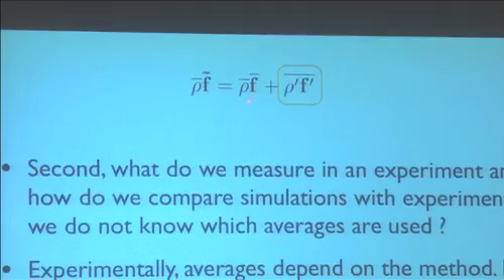The discussion between the Favre and Reynolds average wouldn't be a big one if these two numbers were close—I wouldn't even talk about it. But in practice, I'll show you that the difference between the Favre average and the Reynolds average is pretty large in the flame, and you can show that without even doing a measurement. You can use a model for that.

The most famous model for turbulent combustion in premixed flames is what we call the BML model, named after the guys who developed it 40 years ago. Ken Bray was at Cambridge, and he's still active actually—probably reviewing some of your papers.

What these guys said is: if you measure temperature at a point in a premixed flame—basically a premixed flame is a thin flame front, about 0.1 millimeter—so in a premixed flame, either the flow is cold or it's warm. That means if you measure reduced temperature, either you have 0 or you have 1.

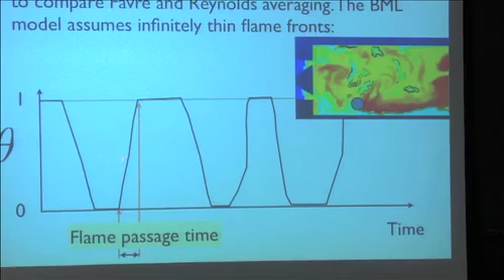In the middle, if you look at the time signal, what you see is a flame passing over you. So either you're in the fresh gas or in the burnt gas, and in between you see a flame passing by. When the flame passes by, you have what's called flame passage times, which are complicated notions, but if the flame is very thin, these flame passage times are going to be very small.

So you arrive at the BML model, in which temperature takes this shape: either cold or burnt, with infinitely small passage times in between. If you call TB the time during which you have hot gases, and TU the time during which you have cold gases, you can actually derive the Favre average and the Reynolds average. This is what I'm going to do now.

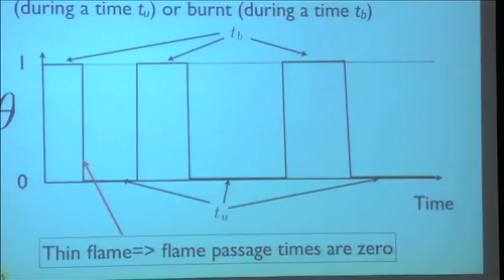First you can compute, for example, the mean temperature in the Reynolds average way. What is the average temperature here? It's easy—you average over time TU plus TB. During time TU, temperature is 0; during time TB, temperature is 1. As a result, the average temperature in a premixed flame is TB over TU plus TB.

And by the way, you see there's a big problem—we've moved away from laminar flames here. What is really this temperature, this mean temperature, the quantity you plot in Fluent, for example? It's not a temperature—it's actually a probability of having burned gases at this point. Because it's not a temperature anymore, but we call it a temperature. The right way to see this is to call it a probability.

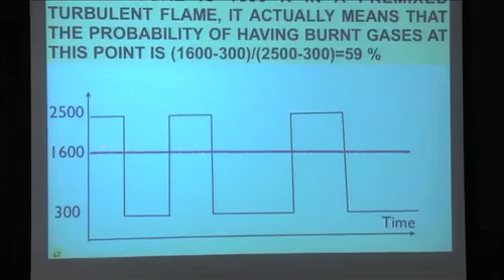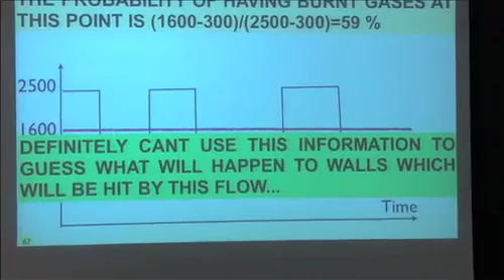In other words, the temperature at this point—if the mean temperature is 1600—really means it's going from 2500 to 300, and on average you get 1600. That means the probability of having burned gases is on the order of 59%. So it's not a temperature. It also means that if you want to use this temperature to guess what's happening at a wall, you're in bad shape—it's only a probability of having burned gases at this point, and there are moments where the temperature is actually 2500.

Now you can continue with the BML model to compute the mean density. The mean density will be, during time TU, the unburned density, and during time TB, the burned density, divided by TU plus TB. If you use the average temperature, you can express it that way.

Rho B multiplied by the mean temperature plus rho U multiplied by 1 minus the mean temperature. You can also compute rho theta, which is what we will need for the Favre average. Same thing: TU rho U multiplied by 0 when you're in the fresh gas, TB rho B multiplied by 1 when you're in the burnt gas. And so this thing is equal to rho B multiplied by theta.

If you combine these two expressions for the average density and the average product of density by temperature, you can compute the Favre average, which is this quantity, and this is what you find. Tau here is the heat release factor, the ratio of densities minus 1. Tau is of the order of 5 to 8 in a flame.

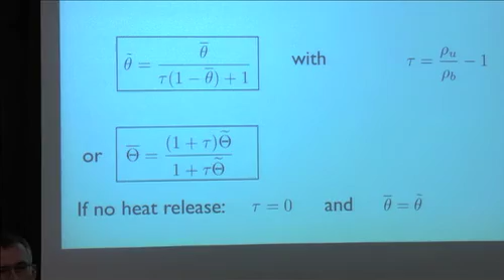So you see that you can reverse this relation. If tau is equal to 0, if you have no heat release, fine. Many of you may be studying constant density flames. That's a good idea, because in a constant density flame, no problem - no dilatation, no tau, everything is equal. But unfortunately, all the others have to face the fact that when tau is not equal to 0, this number is not equal to that one.

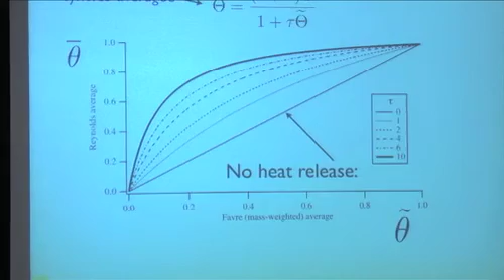So the Favre average and the Reynolds average can be very different. This is a curve here, when you just plot this thing. By the way, the BML model is very powerful - in 2 slides you can derive the fact that if this is the Favre average and this is the Reynolds average, with no heat release they are equal. If you have heat release, they can be very different. You can have a 0.2 for the Favre average and a 0.7 for the other one.

So when someone is telling you, here is my temperature profile obtained from a code, you have to say, okay, which temperature profile - Favre or Reynolds? And usually they don't know, because if you're using Fluent, you don't even know which average you're using. So this is a disturbing problem, okay?

Now there are more disturbing things. I don't want to go too far there, but if you look in this section in the book, you will see that you can prove easily that the average of any quantity Q, in the Favre sense, is equal to 1 minus theta average, Favre average, multiplied by QU, where QU is the conditional average of Q in the unburned gas, and then you add theta multiplied by QB.

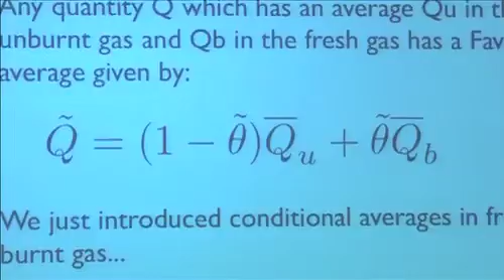What does that mean? What is a conditional average? Typically, a conditional average would look like this. If you measure the velocity in a flow which is reacting and turbulent, you will usually find out that the velocity looks like this - at this point you are in the fresh gases, and then suddenly you are in the burned gases, and then it comes back again.

So what is the conditional average? It's the fact that you're going to look at the theta signal at the same time. This is temperature, and this will be QU. You will measure the average in the fresh gases, or you will measure the average in the burned gases. These two quantities don't have to be equal. Obviously the speed, for example, in the fresh gases, when you average turbulence, it will have a certain average, but it doesn't have to be the same as what you have in the burned gases. And so that's making things more interesting.

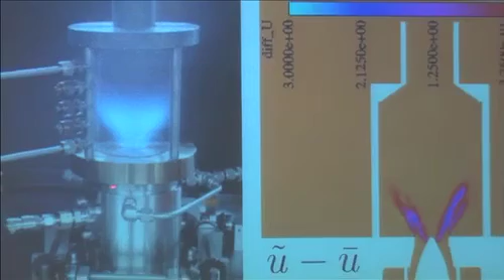So this is a notion called conditional averages, and you can actually use it. I'm going to show you a few examples. I just want to show you here this burner, which is actually the premixed burner I talked about a few minutes ago. This is a field where we plotted the Favre average - this is an LES - minus the Reynolds average. In this LES, you can compute both of them. You find actually that there are big differences here in this zone.

Of course, there are differences in places where temperature is changing. If temperature is constant, no problem. But in the zone where the flame is, which is the zone of interest, U tilde minus U bar can be of the order of 3 meters per second.

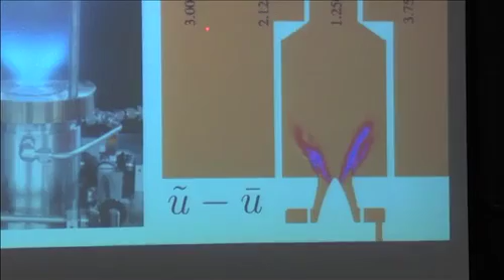Now, if you look at the velocity field in this system, you do cuts here. You put lines here, and you plot the velocity profiles. This is the result - you have the experiment, which is in symbols, and the lines are the LES, and this is typically the 3 meters per second error margin. So in other words, when these points are separated by less than 3 meters per second, it could just be that you're not comparing Reynolds and Favre average in both systems.

In LES, we know which average we take. Again, you talk to experimentalists, you ask them, is this Favre or is this Reynolds? And they won't be able to tell you, because it's difficult in an experiment to know exactly how many samples you take. You take random samples - you don't know if they correspond to the weighting that Favre would require, for example.

Now, it's not the only problem. Turbulence is about fluctuations, so you would like to compare fluctuations also. Here is getting really complex. So let me just give you an idea of why things are getting complicated here.

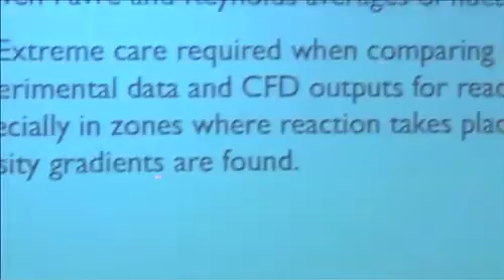When you have large density gradients, this will require some care on how you compute fluctuations. One of the reasons is the following: in LES, we use space average results. They are instantaneous, and then we average them in time if you want the mean.

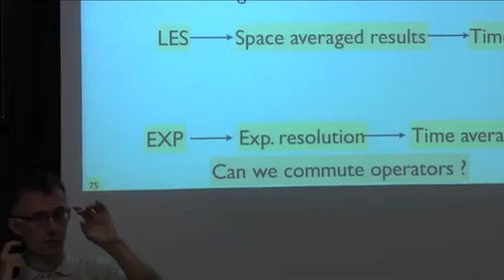In an experiment, you have the experimental resolution. If you're doing PIV, you have a window over which you average results, and then you average them in time. If you're doing LDV, it's different—you still have an averaging window, which is the zone where you have a signal, and this zone doesn't have a clear size, but it's also averaged in some sense.

In the end, what everyone in this room is doing is comparing time average results of LES with time average results of experiments. First thing you have to realize is that the time average results of experiments are obtained over minutes, seconds, while time average results of LES are obtained after milliseconds.

So we have another problem of sampling. Experimental data are very well sampled, while LES, by definition, is very expensive, and we cannot run for seconds. A typical LES in a combustion chamber, if we run 100 milliseconds, it's going to take us 1 million CPU hours. So you don't do that.

In other words, I'll show that tomorrow: 1 millisecond for one of the computations we were doing last year corresponded to 10 years of CPU on a single processor. So you cannot afford to run for a long time. That's a big problem. So let me try to clear this question here.

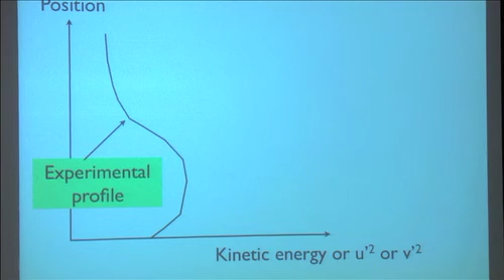This is typically the kinetic energy that you measure in an experiment. You go into the experiment, you have PIV, LDV, whatever, and you plot a profile in any direction of kinetic energy. Then you go into the LES—the first thing you see is that it's going to be much more noisy.

He can run the experiment for an hour if he wants, but you can't. So it's noisy, and usually there's a difference between the two. The question is, why is there a difference?

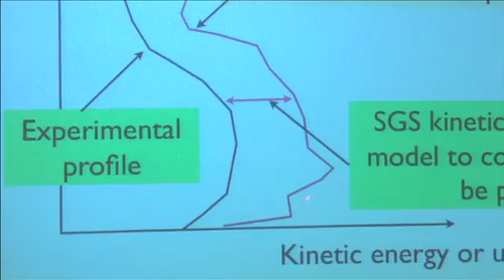In other words, if you have an LES, and this data is here, you can tell the guy doing the LES is wrong, it's not going to work. Something is wrong. This curve should be less than the experimental value, and the difference between the experimental value and the LES corresponds to the subgrid scale kinetic energy that you can model.

But as soon as you need to put a model there, it kind of wastes the interest of comparing things. You're not comparing data to data, you're comparing data to data plus model. And that's a big problem for us. So in most cases, we don't even add this kinetic energy. We just compare the raw data, and we know there could be a difference because by construction, we're not comparing the same thing.

Now I need to start working on the real methods that you use to average, and I will start by averaging methods.

When you use RANS or LES, the same problem you have is to average the Navier-Stokes equations. We want an equation for the average temperature, for example. How do we do that? We take the equation for temperature and we average it, and normally we should obtain an equation for the average temperature. Except when you do that, you end up with what we call unclosed terms.

So we start from the instantaneous Navier-Stokes equation, and we'll end up with typically terms like this, where we'll have, for example, the product of the velocity by the temperature. If we wouldn't have these nonlinear terms, life would be extremely easy. If, for example, all the Navier-Stokes equations would be linear, if you would only have terms like alpha theta, where alpha is a constant, when you average them, you would find alpha multiplied by the average temperature. That'd be simple. But in practice, it's not the case.

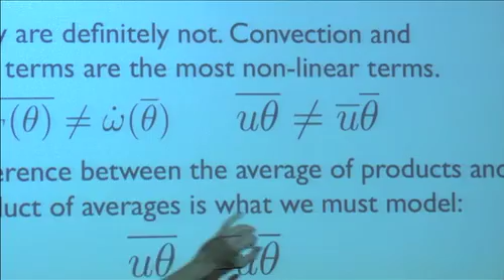In practice, you have a lot of terms like this one, the product of a velocity by a temperature, and since it's a nonlinear product, this is not equal to that. And of course, in this term here, we have a lot of exponentials. If you take the average of an exponential, you will see in a few seconds, it's not equal to the exponential of the average. And so the difference now between this quantity and this quantity is what we have to model.

We want to express everything in our terms as a function of this quantity. These are the quantities which are the variables for our code. And these correlations, we don't know them, so we want to model them. We need to replace them.

So what's the procedure? We start from the Navier-Stokes equations, and we average them, and we get unclosed terms. For these terms, we need closure models. And by the way, you see we are far away from all the details of kinetics. We're not able to incorporate all this stuff here.

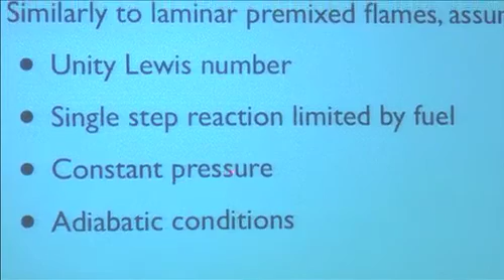So let's start with premixed flames, supposing that the Lewis number is unity, that you have a single step reaction limited by the fuel. This is what we did for premixed flames, under adiabatic conditions and constant pressure. In that situation, as I've shown yesterday, you can have only one variable, the reduced variable called the progress variable, which I'll call C or theta depending. In the world of premixed turbulent combustion, everyone works with that thing, going from 0 in the fresh gases to 1 in the burnt gases.

If you look at the Navier-Stokes equations and average them, this is what you find. The continuity equation remains what I've shown before, except here you have an average for the density and a Favre average for the velocity. If you look at the momentum and the temperature equations, they really look exactly like the laminar equations, where you would replace the instantaneous value by mean values, except you have additional terms here. These two terms here are turbulent diffusion, and this is the mean reaction rate.

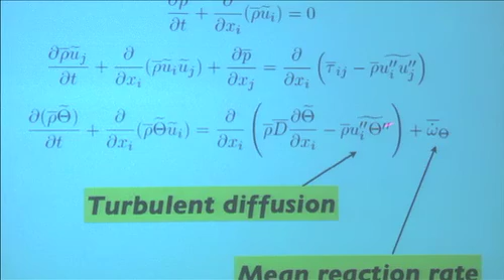And these two terms are what you need to model. I'm going to show you models now. I don't want you to be afraid by the way we build models, because this is the way it's done. I think you're going to have a hard time believing how simple this is, but this is the way we do it. Our goal now is that you can write a code where the variables will be rho bar, theta tilde, and ui tilde. If you want to write this code, you have a problem, because this is not expressed as a function of the mean variable. So you need a model to express this as a function of these quantities. How do you do that?

Well, the first thing you look at is the turbulent diffusion term. It's the rho u theta correlated average. So you can write it as average density multiplied by the Favre average of these things. And how do you model it? You need to model it as a function of things you know. What do you know? Well, you know the mean temperature. So usually you're going to write this thing as a gradient of temperature. It's exactly the same thing you do when you use the turbulent viscosity for the momentum equation. You try to express what you don't know as a function of things you know.

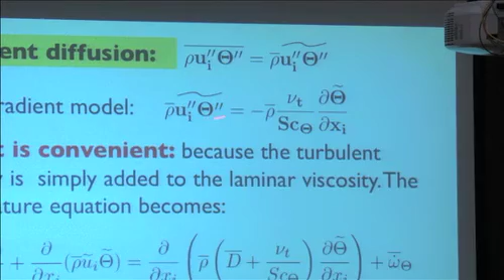So when you do that, the nice thing about this is once you include this approximation in your model, you end up with this equation. Instead of having an unclosed term here, you have something which is a function of the mean gradient of temperature, and then you just need to add a turbulent viscosity or a turbulent diffusivity. Normally you say the turbulent diffusivity is equal to the kinematic viscosity, the turbulent one, divided by a Schmidt number. The Schmidt number here is usually taken equal to 1. Well, you can do that, but it's a dangerous operation, and I will show why it's dangerous in a few seconds.

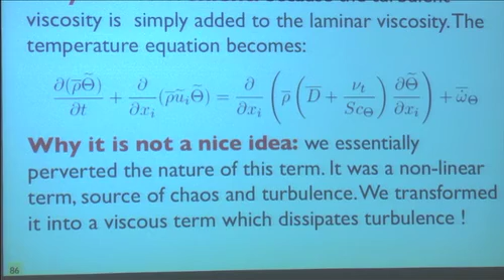Then, if you look at this expression, you can wonder how we got this shape exactly. Let me show you how this is done. It's written now with C instead of theta, but it's the same demonstration. We look at a flame where the mean temperature looks like this. You have to realize that when we show something like this, it really means a flame which would look like that. If you do a DNS, it would be a flame like this, where C equals 0 here and C equals 1 here. And the mean temperature would be 0 here, and as soon as we start seeing some flame elements, it goes up, and it's doing that. So this is theta average.

So we need to model now this term, this guy here. How do we do it? Well, people doing turbulent combustion, you know, they are not very subtle. They say, well, this term is zero here, because here C is equal to 0, so of course its perturbations are equal to 0. And this term is also equal to 0 here. What else do we have which has the same property? Well, the gradient of C, obviously. The gradient of C is non-zero in the same zone.

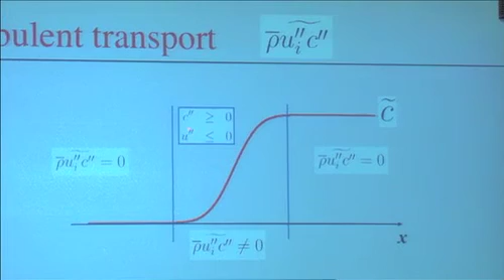That's a good model. The second thing you say is, what should be the sign of this thing? Well, it would be good to have a model which has a good sign, and the good units also. So you look at the sign of this thing. That's a usual problem here. What is the sign of this thing? If C here, this number is the perturbation compared to the mean. So typically, if you are here and you see a positive C, it means you are above this line. You have something warmer than the average.

And now the intuition is the following. If you are here and you see something warmer than the average, it must come from the right side, because the warm people are on the right side. So if C is positive here, the perturbation, then the velocity must be negative, and vice versa. In other words, we know that the sign of C tilde, U tilde here, C prime, U prime must be negative. That means we need to put a minus. That's a good model. And then you look at the dimensions, and you realize that to have the right dimensions, you have to put a viscosity and a constant here. If you're smart, when you write a turbulent combustion model, you always plug in a constant that you can tune later to make the model work.

And this is how this model was built. Believe it or not, it's used in all codes. Everyone in LES is using this model, everyone in RANS even more. And if you're using Fluent, you do that every day. Now why don't we like it? Well, we don't like it, but you have to use it anyway. I just want to give you an interpretation of what has been going on here.

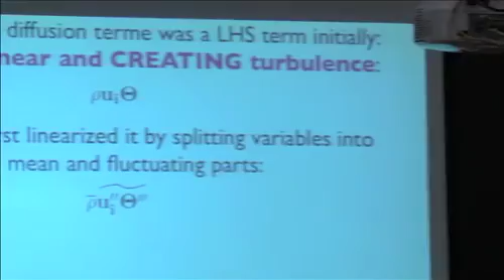I didn't mention that before, but you have to remember that turbulence—probably some of you have taken courses on chaos and bifurcations and all this stuff—you have to remember that if the world of the Navier-Stokes equations would be linear, there would be no turbulence. Turbulence occurs only because you have nonlinear products of things. So nonlinearities are the quantities which create turbulence.

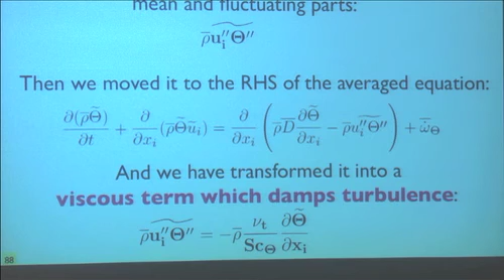Now what we did here is that when we average this term, it created another term here which has the same nature. It's a turbulent term, an agitation term, it creates turbulence. And then we transport it to the right-hand side. That's fine, you can take it from here, put it here. But then we transformed it into a viscous term. So the nature now of this term is completely different from what was there initially. Instead of having a term which creates turbulence, we have transformed it into a term which damps turbulence.

So this model cannot be accurate. At the same time, we don't really have a choice. I will tell you why in a few seconds. We don't have that many alternatives for that. You can use the BML model to understand what we really did, actually.

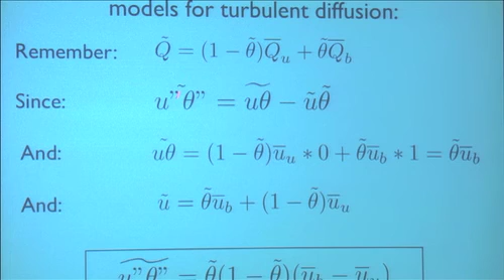I've shown you this property here of the Favre average being expressed as the conditional averages in the fresh and in the burned gases. You can use it for this quantity. And you can show that the term that we just modeled is equal to this product of mean temperature multiplied by the mean velocity in the burn gases minus the mean velocity in the fresh gases.

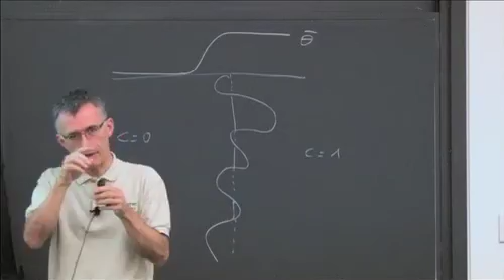How do you do that? Well, you go here, you draw a line here, and you take the mean temperature for all these points. This is called the mean temperature in the fresh gases, and for the burn gases, you do the same thing for the rest. So when you are completely in the fresh gases, the conditional average is equal to the normal average, and vice versa. But in the middle here, these averages depend on how much fresh gases, how much burn gases you have.

The interesting thing is that the model which we just wrote is this one, and the BML model tells you that these two things which should be equal is this one. So that really means that the gradient of temperature and the difference of the velocity average in the fresh and in the burn gases should have the same sign.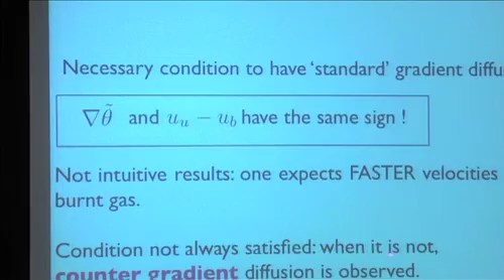In practice, this thing is not intuitive at first. One would expect faster velocities in the burnt gases, whereas this thing says it should be the other way. And this condition is not always satisfied. If it's not satisfied, then we have what we call counter-gradient diffusion. Counter-gradient diffusion is also a big hit in the field of premixed turbulent combustion. It's those cases where the model here just doesn't work—even the sign is not right.

So this is a point which can be investigated in DNS. Actually, DNS is a good way to investigate these questions. We did that a few years ago. That's a very big DNS here. You have the cold gases, the burn gases. The gradient of temperature is positive in this way. And we did two cases, one with low turbulence intensity and another one with high turbulence intensity.

This was published in CNF a few years ago now. And when you plot this term which we model, we saw that there was a different sign actually for the low turbulence and the high turbulence case. In other words, for this DNS, we found counter-gradient diffusion here, and we found gradient diffusion here. And that really proves that the model which everyone is using is not valid in all cases. At high turbulence intensity, it is valid, and at low turbulence intensity, it's not.

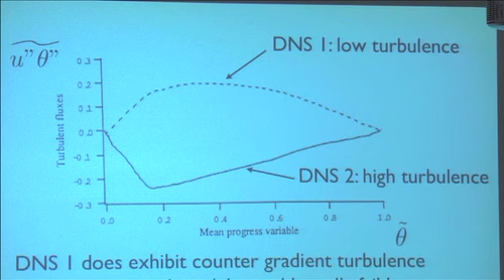So in the end, what you need to remember is that everyone is using this model, but there are situations where even the sign of this model will be wrong. You have to know it. But on the other hand, we don't have much choice to replace this model. People have tried to find better models, and for the moment, everyone is stuck with this one. So this is what you will find in the literature. There's not much more to do about that. The only thing you can do is use a smaller mesh to decrease the importance of this.

Okay, let me talk about the second term now, which is even more of a problem. This is the reaction rate. So now we have, yeah.

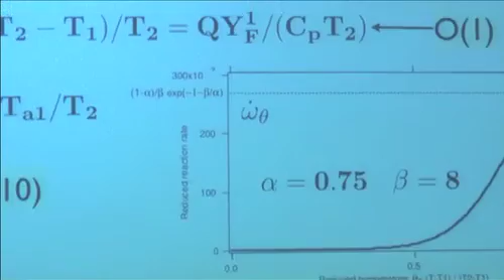When you do the model, if you don't have a DNS of the thing, how do you know the ratio of burnt gas? You don't know - you need to write a model. The question is, without a DNS, how do you know which portion is in the fresh gas and which is in the burnt gases? You need another model to tell you that. You can guess, for example, from the mean temperature: if it's small, you're on that side; if larger, on the other side. But again, you need to invoke more models there. It's modeling again, you need to guess things. That's the problem, but it's not the worst problem.

I'm going to show you the worst problem now. It's that you need a model for the temperature and the heat release. The heat release has this expression, which we saw yesterday as a function of the reduced temperature - it's a curve like this. What we need to do is figure out: we know that if the temperature is here, the instantaneous reaction rate is here. But we don't know the instantaneous temperature, we just know the mean temperature. So we need to guess what the average reaction rate will be.

And if you remember your math, you know that if this curve is nonlinear like that one, it's very difficult to average. So let me show you why.

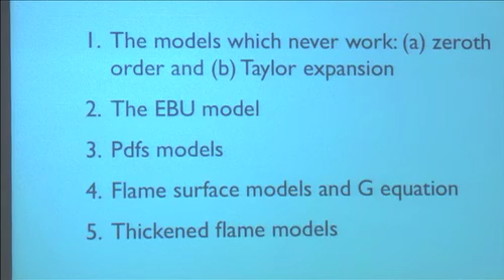So the model which never works is the following: if we know the shape of the reaction rate, why don't we just plug the mean directly into the expression? We know the instantaneous form, so we take exactly the same expression for the mean. That's a simple way of doing it.

But the problem is that's a simply stupid idea, because the shape we're trying to average is the following: if you plot temperature versus time, you have these things, and if you plot the reaction rate, you have this - every time a flame passes in front of you, you get a big spike of reaction rate, then it goes back to zero. The mean reaction rate is the average of all these spikes. For example, these two temperature signals have the same mean temperature, but one has many more passages than the other. So if I just use the mean temperature to construct the mean reaction rate, I can't - this won't give me that.

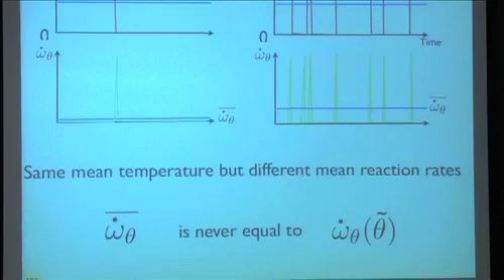You can also prove it by doing the math - I'll do that in a second. But in a system like this, which is completely nonlinear, you cannot just plug the mean into the expression to get the result. You need more information.

Now, of course, you could say: I understand the problem is that you're doing something too simple - why not take more points in the Taylor expansion? Basically, what we try to do is look for the mean of this expression. Plugging the mean directly into the expression might be too simple, but maybe we could take a Taylor expansion instead - expanding the exponential as a function of higher order terms. The terms are a bit tricky, I don't want to go into the details, but you end up with a model for the mean reaction rate where the means are plugged in directly into the expression.

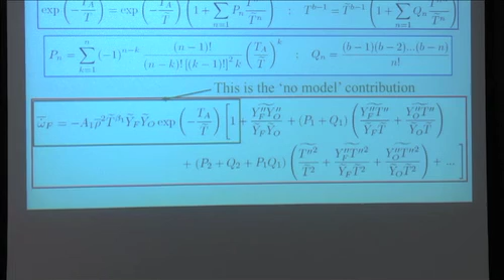So if you look at this term here, this is what we call the no-model contribution, and then you have a contribution of the different non-linearities in the problem. You can try to use this, but in practice when you do that, you find out that this term is larger than that one, this one is larger than this one, and this one is larger than that one. In other words, it's a desperate attempt, because every correlation here is larger than the mean. So in most cases, you don't do that.

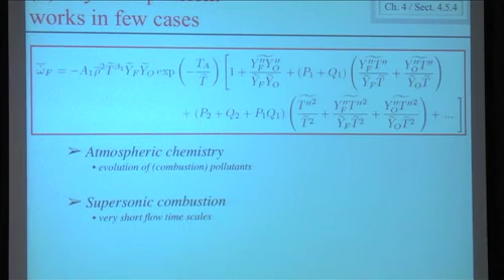There are a few cases where it works. Just want to mention those cases. Atmospheric chemistry is one example where people use a model like that. In supersonic combustion, because the flow time is so fast, you can use it. But in all other cases, no one's using that. It simply doesn't work.

So let me jump now to the opposite side: the Eddy breakup model. It's probably in all codes—if you're using any commercial codes, they have the Eddy breakup model in one shape or another. It's really interesting because it was written by a guy called Spalding, Brian Spalding. And Spalding didn't care about the details, he just saw the big picture. He said, what's important for reaction is to have flame passages for the mean reaction rate.

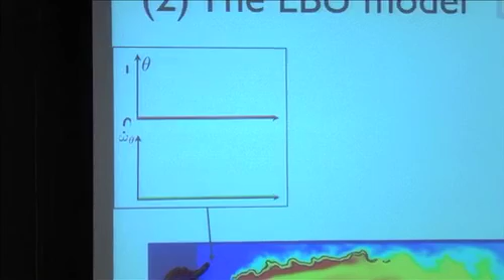For example, if I'm sitting in the fresh gases, there's no flame passage, so I should have a zero mean reaction rate. If I'm sitting in the burnt gases, it's the same thing—the temperature is equal to 1, there is never any flame passing by, so the reaction rate should be 0. And in the middle, the reaction rate should be proportional to the number of passages of flame. A very simple idea.

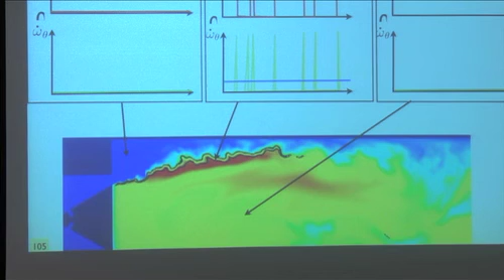It's nothing complicated about that. So he said, can I write a model which accounts for that? How do I count the fact that the flames are passing by or not? Well, there's a simple way to do that.

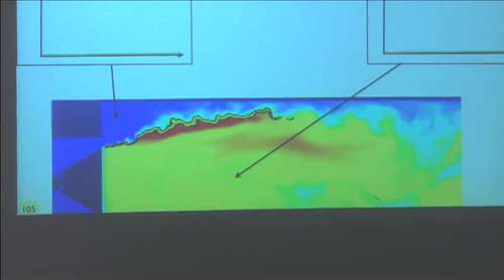The other quantity, in terms of bounding, which is 0 here and 0 here, is the fluctuating temperature, the RMS of theta. It's 0 here because theta is constant equal to 0, and it's 0 here because theta is equal to 1. So you just write the model where you say the mean reaction rate will be proportional to the fluctuation of temperature.

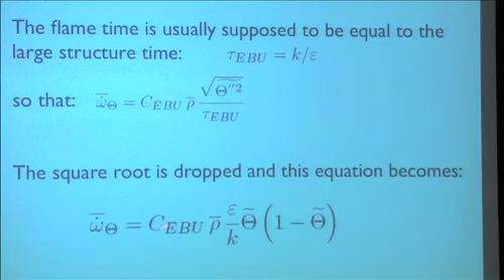And after that, you introduce a time linked to the number of eddies which lead to flame passages. You suppose also that the flame is thin, and if the flame is thin, using the BML method, you can prove that this quantity is equal to that, only with averages, and you end up with the famous Eddy breakup model. It says there is no reaction rate when the temperature is 0 or 1, and in the rest of the region where there are flame passages, the reaction rate has this shape here, scaled by a constant and by a time—this is the time of the largest eddies, epsilon over k.

And you just plug that into your code, and right away it works much better than the other models. So why is it so? The first thing is that when you do measurements, you can measure the mean reaction rate in an experiment. You see actually that this is data obtained at École Centrale in Paris. You see that the mean reaction rate as a function of the mean temperature has definitely a shape which looks very much like x multiplied by 1 minus x.

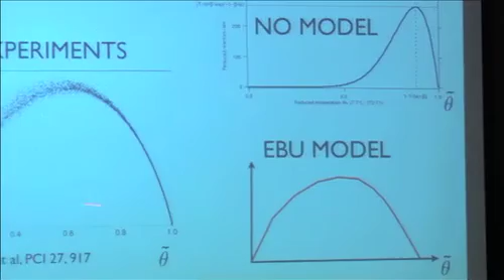And here, look at this function, it's x multiplied by 1 minus x. It's much closer to the Eddy breakup model than what we would get with the no-model. The no-model would assume a shape like this, and that doesn't work. So we see that the Eddy breakup model captures a lot of the good physics here, the physics you would like to have.

So it's good, but at the same time people could say, hey, why is chemistry gone? Because, for example, the pre-exponential constant I had in the reaction rate, where is it now? Well, the answer is it's gone—it's in the constant, it's hidden here. You don't even have the equivalence ratio here, it's gone. So the problem with the Eddy breakup model is that when you run it for one flame, you're tuning this constant until it works. You go to another flame, you have to tune another constant.

I remember papers submitted to the symposium 10 years ago where there was a table of constants to be used as a function of the case. They tabulated the constant, and then you can say, if I have the flame, I can compute it, but if I don't have it, I can't. So it's not a predictive model. But for certain cases it can work, for example if you just change the geometry but not the chemistry, you fit the constant once and probably you can use it to extrapolate things a little bit. But this model is really the one you will find in a lot of places.

At the other end of the spectrum, you have PDF models. PDF models are what we call the ultimate model. PDF basically tells you that if you want to know what's going on, you shouldn't know only the mean, you should know all the PDF. The PDF is just a way to talk about histograms.

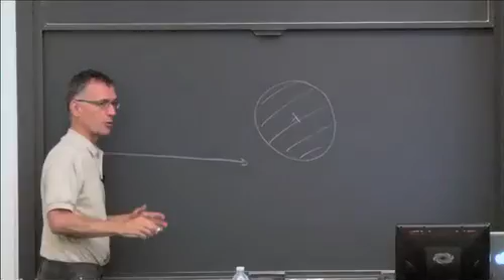We can do that right away here. To give you an illustration of PDF, we can do the PDF of the size of the people in this room. I cannot do it in feet, I have to do it in meters. So you take the first guy down there and ask him what his size is, and he says 1.8, and you put a +1 here. Take his neighbor, he's 1.71, and you add a system like this, and you end up with a histogram of the sizes of the people in this room. You can do that, for example, for Princeton University, and you will obtain a shape. How would this shape look like?

I've been doing that for 20 years, and it always works.

No, it's not Gaussian. I believe it looks like this. Because men are usually taller than women. Depends — in France, we did it actually in my school, and we got two bumps here.

The idea here is that it shows that it's easy to imagine a PDF, but it's not easy to find the shape of the PDF. As soon as the process gets complicated, guessing what the PDF is becomes the whole game.

If you have the PDF, then you have everything. Because, for example, the exact expression of the mean reaction rate is just the reaction rate for a value theta star multiplied by the PDF of theta star, d theta star. You integrate it and you have everything. So the idea with PDF models is if you have the PDF, you have everything. In practice, having the PDF is the difficult part of the game.

To find the PDFs, I won't go into that now — it's not that I don't believe in these things, I just believe they are too difficult for me. There are quite a few good papers, including one at the last Hottel lecture last year by Steve Pope, who is really the king of these things. The difficulty really in this problem is to build a PDF.

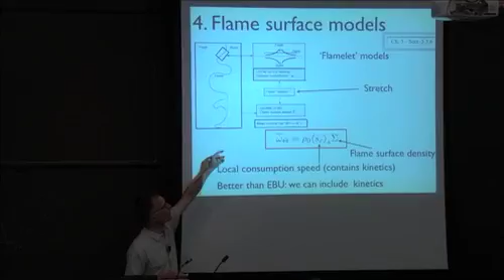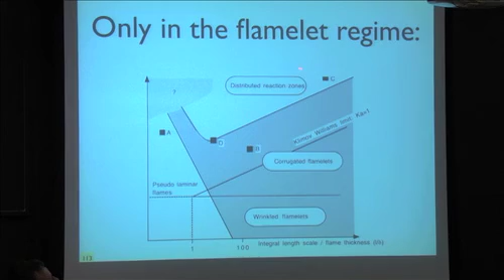Now, one model which is a good intermediate solution is the flame surface model. Flame surface models are used in multiple places — for example, piston engines, they are quite often found there. The idea here is to say that if the flame looks like a flamelet, if it's a surface, the average reaction rate along the surface will be the average consumption speed multiplied by the flame surface multiplied by the density. So if I know these two quantities, I can find the average reaction rate. You can only do that if you're in the flamelet regime — you shouldn't use this for a flame which is really turbulent. But in most cases, in this region, you can use flamelet models, and you will have two quantities to find: the mean consumption speed and the mean flame surface.

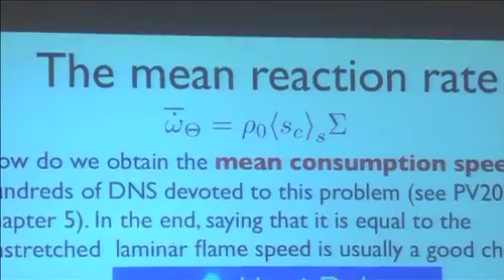In most models, the mean consumption speed, even so I told you yesterday, is complicated. It depends on the stretch, it depends on curvature, it depends on other things. In practice, what people do is say the mean consumption speed averaged along this surface is just the unstretched laminar flame speed. That's it, because it's difficult to do better than that.

So the real problem is not there. The real problem is to find the flame surface density. Because on this quantity you can make a mistake of 20%, but on this one you can make a mistake of 500%. How do you find the flame surface density of a flame?

Again, when I talked about flame surface, it looks like a simple idea. If you want to know really what flame surface is, you need to read this paper of Steve Pope again, and that's going to hurt. This is the equation for the flame surface density. First, the definition is given here. It's not that you can just measure a flame surface - it's a probabilistic notion. So for example, here, if you want to find the flame surface, it's the probability of having a given temperature multiplied by the gradient of temperature at this point.

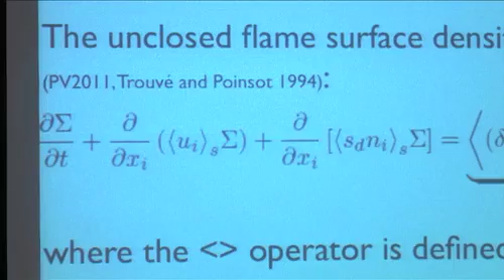It gets complicated. So the equation for sigma is written here. I showed you yesterday the unclosed one. This is the closed one, where you have all the models here. You have the stretch, which appears here, and you have to model this thing. And this is where models get interesting.

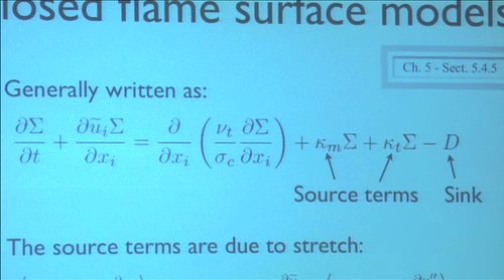Let me show you one of the models. For example, this is the coherent flame model, which was initially written at Caltech 40 years ago. This guy said, for sigma, I'm closing terms with a turbulent diffusion term, a source term, a sink term, and I need models for these things. And this is where things were nice until now. When you reach this point, you need to close these terms, and this is where it gets ugly, because you need to find a solution to close them.

So this is an example of how it's closed, for example, for the model used at École Centrale in Paris. You put a constant here, you put epsilon over k multiplied by sigma as a source term, and here you have a sink term. When these two terms are equal, you find the Eddy breakup model. In other words, at equilibrium, when this equation leads to constant sigma, the model leads to the Eddy breakup model, which is a nice extension of it.

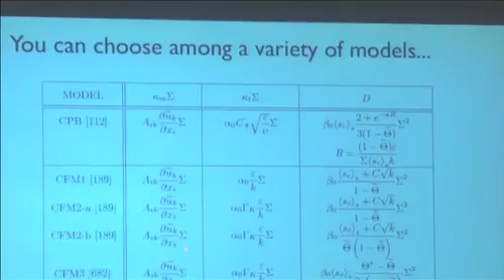The problem is also that when you go into the literature and start looking at models, you find models everywhere, which again shows that no one agrees on what the model should have here. This is just a list of a few models which we tried a few years ago. This is the source term, this is the sink term, and you see that everyone is coming up with a new model. It's like a big game - my model is better than your model.

And as I showed before, well, okay, I stopped playing that game a long time ago. I believe it's a desperate game. So there are other ways to do this. One way is to try to resolve the flame movement as much as you can. One solution for that is to use the G equation.

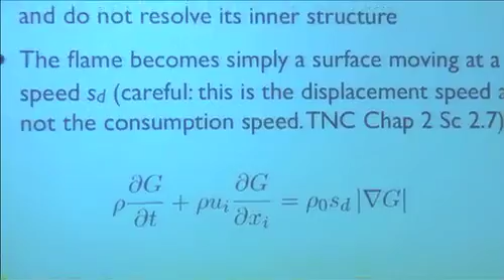So the G equation is this idea that if the flame is not too thick, you might as well say it has zero thickness and propagate it as an interface with no thickness. The way to propagate an interface is the famous G equation. This equation propagates the signal G at the speed SD. You can prove it mathematically, so it's been used by a lot of people, and it works really well when density is constant. You can see a lot of details on that, for example, in the book by Norbert Peters, and Heinz Pitsch, I suspect, talked about that last year, but you were not here, probably.

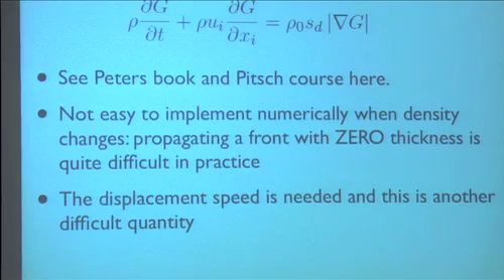Numerically, it's a big problem to implement because the density is changing. So you have an interface - some of you are probably writing codes - you can imagine that if you have an interface on which you should change the density by a factor of 6 over one cell, usually it's an interesting game. The other problem is that you need the displacement speed, and I've shown you yesterday that the displacement speed was a very difficult quantity to use.

The idea here is that if you multiply the flame diffusivity by a factor f, and divide the flame reaction rate by a factor f, you get the same speed. Since our main problem is spatial resolution, this is a way to make flames thick enough to be resolved on your flame front.

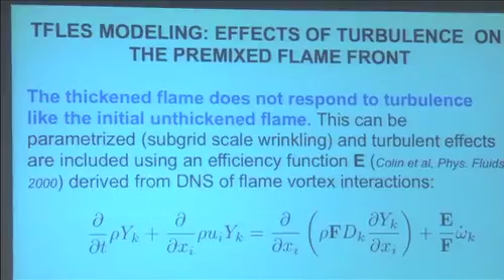Now, of course, if the flame is thin like this or thick like this, it does not react in the same way to turbulence. A very thick flame will be almost insensitive to small vortices, while the initial flame was sensitive. So you have to do something about that.

And we did that a long time ago by introducing an efficiency function. How did we get the efficiency function? Basically, we tabulated, we compared thin flame and thick flames, and we just introduced a correction factor.

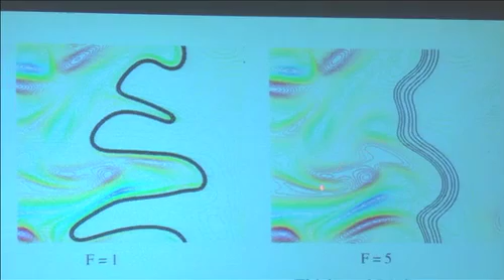So how do you do it? You take, for example, this flame here, which is thin, and you make it thicker, and you send it into the same turbulence. So this is exactly the same flow, except this flame now has a bigger thickness. Since it's larger, it doesn't wrinkle as efficiently as that one, obviously.

So we can measure the reaction rate in these two things and tabulate it as a function of the thickening. And then after that, when we won't have this one, we'll have only that one, we'll know that here we are underestimating the reaction rate by this factor.

So you can do that by using DNS and theory, and you end up with an efficiency function which is tabulated here as a function of u prime over SL0 and the integral scale divided by the laminar flame thickness. Once you have that, it's very easy to plug it into your code and run it.

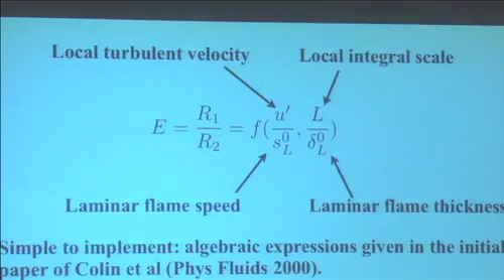One of the reasons why the thickened flame model is used today by a lot of people is just because it's simple. I believe, in the long term, only simple solutions are used. Complex solutions do not survive. When the PhD student who wrote the code goes away, the next guy who shows up opens the Fortran code, he doesn't understand anything, and he says, I want to do something else.

So it has to be simple. It has to be simple. If you want it to survive, it has to be simple. Now, of course, this is simple, but you can make it more complicated. You can even make it dynamic. I won't describe this here.

But you should be careful. My students, for example, in France, many of them forget that the model is there. They believe it's working. Well, there's a lot of things hidden in these functions. It contains a lot of information. I'm just going to show you how the function looks like.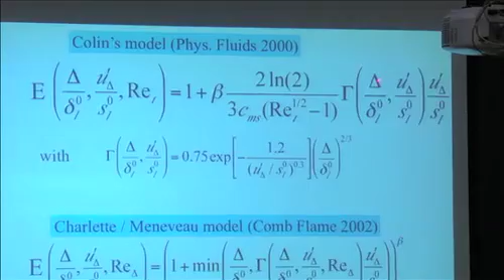It takes 2 lines of Fortran to code it. You just put here the size of the mesh divided by the flame thickness, U prime divided by SL. You compute this function and you have it. So in the Fortran code, it's easy to forget it's there, and after that, the model goes and works without you, basically.

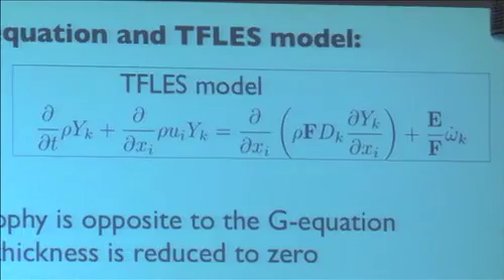Now, the G equation and the flame model are actually very similar. The G equation says, I'm going to solve this flame by making it infinitely thin. And the other approach says, well, I'm not going to do that because of density variation, etc. I'd like to make it just thick enough that I can solve it on my mesh.

In both cases, the objective is the same. You want to propagate an interface at a speed that you know, which is either SL or ST, whatever. And the numerical issues are actually the same.

When people tell you that the G equation is solving the flame front over one cell, it's not really true. To make it stable, you need to thicken the G equation too. That's what people don't tell you, because otherwise the code explodes. It's very difficult to resolve a front which has a shape like that and a jump in density by a factor of 7.

So in practice, the objective is the same. All the variables are not mean values; at that point, there are still instantaneous variables here. You can do the same thing in LES or DNS. The question was, is this instantaneous variables or average variables? The answer is both—you can do it with DNS and with LES.

There have been several extensions of the TF-LES models, and we use one even for diffusion flames. The way we do that is we use a flame sensor, S. This sensor is 0 when you're far from flame fronts, and equal to 1 when you're within the flame front. So the model becomes this expression.

Let me tell you something else. When I was your age, I followed a course by Bill Reynolds, a professor at Stanford and a specialist in turbulence. He gave a course lasting about five weeks, trying to write an equation for epsilon, the dissipation, in a rigorous way. After five weeks, he came back and said it's not working, so I'm going to write it the way I want it to be, because I know how it should look. When people do that—give up on deriving the equation and just write it the way they want—they call it the master equation.

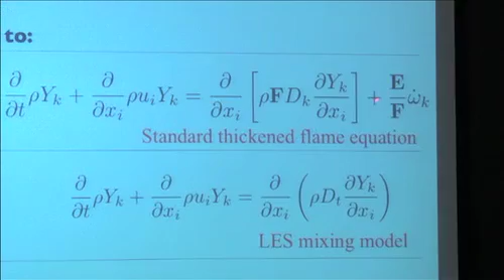So the way the model works is as follows. That's what we call the master equation—the equation we have in our code. Why is it that way? Because if you're in the reaction zone where combustion takes place, the sensor equals unity, this term goes away, and you have the standard flame equation, where you know the flame will propagate at the speed you want.

If you have a zone with no flame, for example pure mixing, you shouldn't mess with the mixing—you should let it work with normal turbulent diffusion, and that's what the model does. If S equals 0, that term goes away, and you have Dt, the normal turbulent diffusion term, so mixing is captured normally in those zones.

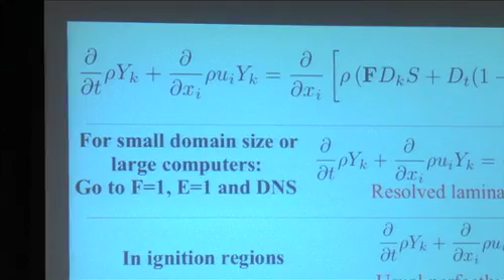If you have a very large computer and can bring F to 1, you'll just have a resolved laminar premixed flame. In DNS, as computer size grows we can put more points, decrease the flame thickness and thickening, and go directly to DNS. So with the flame model, you basically just have to wait—every day your computation gets better because you can put more points, meaning less thickening.

When you have an ignition region, you can keep this model because the reaction rate will be active, so if the flame must ignite, the model will capture it. Same thing for a diffusion flame, and near a wall this term goes to zero because of the exponential temperature effect. So all these things will be handled—not perfectly, but at least they'll be in the model.

So as I said, ultimately, if you wait long enough, the thickening factor will go to 1, you will have DNS. The kinetics are there. You don't need a model for the kinetics. You can incorporate reduced kinetics.

And this is the status, for example, this is a big chamber, about half a meter here. This is the typical thickening factor which you find. It depends on the size of the mesh, but you see it goes up to a maximum value of the order of 40. That means you make the flame 40 times larger than it is in the real world, but this is pressurized - it's a very extreme case.

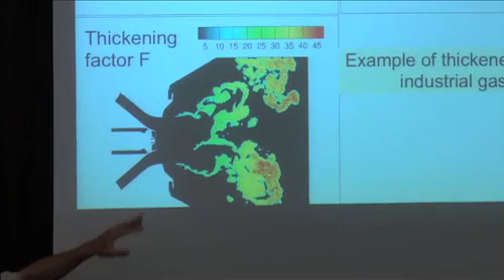And it was 200 a year ago. Now it's 40. We believe in 2 years we're bound to 10. And that's, again, a lazy man solution, but that works.

Okay, I want to finish with a comment on this model, which I call the no model. The no model is making me nervous because we see more and more papers submitted to Combustion and Flame or to the symposium where people use the no model. The no model is usually used with a very complicated kinetic scheme. People just take a full kinetic scheme, put averages everywhere, and run it. The very surprising thing is that it gives results. I want to explain here why it gives results and which kind of results you have to expect.

Yeah, so I called it the nut model. The first thing you have to say when you do a model like this is that if you just plug directly your chemical scheme and use average quantities there, you are just trying to resolve a flame front which is 0.1 millimeter with a mesh much larger than that. There's just no way you can do it.

As I said before, a typical flame front looks like this. If you're using a mesh with a point here, and a point here, and a point here, there's no way you can capture this flame front. So whoever is trying to use the chemical scheme which works for laminar flames in other cases is just not doing it right if he's not using a mesh which is fine enough. And fine enough means you have to be finer than the size of the flame front.

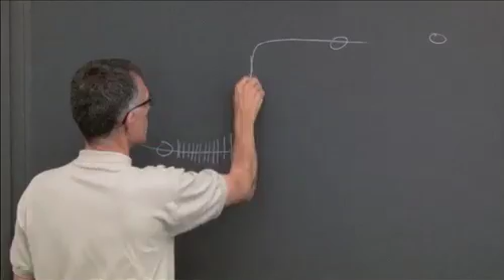This is why we use the thickened flame model. We make it thicker so that we can resolve it. But this is not what you do when using the nut model. You just go right away, you plug complete chemistry in your code.

So the interesting point is, why does it work? Because normally in a good code, if you try to resolve a front with not enough points, it should blow up. Well, the reason why it doesn't explode is because the code is bad - another aspect is that it has a lot of diffusion. So I'm going to show that in a minute.

The equation which is used, for example, for TFLES is that one. If you're using the nut model, you just basically take the laminar reaction rate and use here a turbulent diffusivity. It's very strange that this term is added here and this term is unchanged. Normally, you have correlations in both terms - this should be modeled in exactly the same way. If you use a turbulent diffusion term here, and here you use a laminar term, there's something strange here. And of course, if you would do DNS, you would have a 0 diffusion term here - that would be the right answer.

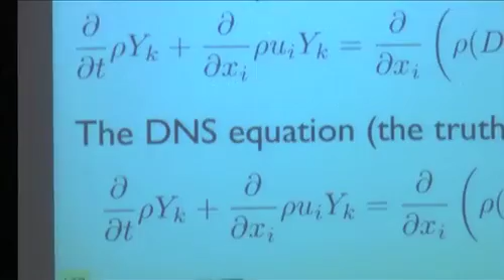So if you use theory and try to look at what's going on here, you find the following thing. You find the flame thickness of the thickened flame model is of course the real thickness multiplied by F - that's the way it was built. For the nut model, you find that this thickness depends actually on dk, the turbulent diffusivity, on the real speed of the flame, but then you have a dt here.

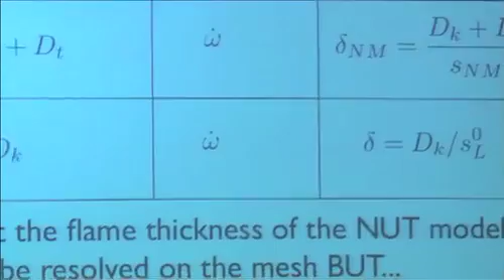And you see the point about that is this thickness can be large if dt is large enough. In other words, this model is also thickening the flame, but it's thickening it in a way which is uncontrolled - controlled by the turbulent diffusivity that you put here. That means it's possible for a model like that to be stable just because diffusion is basically taking away all the heat produced by the reaction rate. The point is that you're certainly computing a flame, but you're not computing the right one. And if you compute the speed at which you're propagating this front, the speed will be the normal speed multiplied by something which depends on the turbulent diffusivity, which you don't control at all.

So you have absolutely no control in this model on the speed at which this thing will move. If you're using the NUT model, you will resolve a flame, but not the right one. And it will give you a result - that's a nice thing, right? It will give you a result, but if you change the mesh, if you change any model, you will have another result. And that's something that we would prefer to avoid if possible.

The thing which makes things even worse is that in those codes, usually you also have a very large artificial dissipation - I'll talk about that tomorrow. And if you have a large artificial dissipation, it will also change the flame speed. So in the end, the no model, my advice is really don't use it.

Yes? Just if you could go back - the reaction term you mentioned, is it a total, is it based on a correlation? So you have this E function that is parameterized by different values of F, the flame thickness.

Yeah, that's for the second flame model. So could you just speak to the difference between deriving a correlation for the reaction rate term based on F and having a term for the front thickness that's based on a turbulent diffusivity that's parameterized based on whatever empirical correlation. So if you just move the term from the reaction rate term to the front thickness term, is that the same?

I mean, you're still making an assumption, so - that's the nice thing about giving a course to people who know the field. You're right, there are many choices to do that. You could move everything from here to there.

In other words, you could speed up the flame by keeping here the normal reaction rate and bringing everything here. But the point here, if you do that, is that the resolution, the spatial resolution for that term would be crazy. You would need the mesh which matches the real laminar flame thickness, and that doesn't make sense. So you still have to keep the initial idea that the whole thing makes sense only if you resolve the flame front initially.

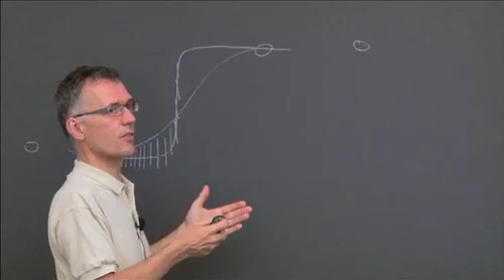If you try to compute a laminar flame, it's very surprising that people believe they can do that, because if you try to compute a laminar flame with Chemkin, you're going to use adaptive meshes, you're going to use very small meshes, and it's going to be difficult. So why would it be easy now, suddenly in Fluent or codes like this, to use a big mesh and just compute a laminar flame? It's just impossible. Either you put the resolution, or you get the wrong result.

But I agree with you. This controversy about which term should we use to get the right flame speed is common in the literature. It's actually the reason why I'm mentioning it today, because I think people get confused about it. They end up thinking it's all the same. No, it's not all the same.

I believe this is a very bad model, because you are using a model here. Remember, this term can be 100 times larger than that one. So all species will diffuse at stupid speeds here, while here you keep the laminar expression. It's not tuned, it's not compatible. If you're using a laminar reaction rate here, you should use only the molecular diffusion here and not the sum of the two. But it's a tough issue.

I believe that I like to control the thickness of the front I'm propagating. So basically, I think this method is based on reasonable ideas. This one is just based on the fact that people doing kinetics don't know turbulence, and they just try to sell this equation as the right way to do it.

And there are a few cases where it works, typically diesel engines, for example, because in diesel engines these terms are negligible. Everything comes from that term, and there is no spatial gradient, so you're fine. But if you go to a real engine or to real combustion, this should not be used. It's my advice. Nice. Other question?

You also have a similar problem with artificial viscosity with the thickened flame model, right? Yeah.

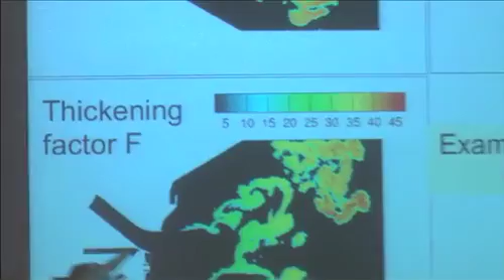Can you explain a little more how you actually calculate the S? That's a critical part - I didn't say that on purpose. The S factor is basically something which should cover the zone where the flame is. You can either use the reaction rate - what we do usually, we use the reaction rate and then filter it a little bit more to be sure to cover the zone where the flame is. There's also a sort of triggering problem to make sure you thicken the flame everywhere when it's active, because if you don't, it explodes. If you fail to thicken the flame at a point where there is reaction rate, in our codes, the whole thing goes crazy. So you need a sensor which really covers the flame front. I think I had a picture here which probably shows this - the sensor would look a little bit like this, covering all the zones where reaction rate takes place.

Does it mean that you're actually tuning that S for the problem? Yes, sure. You need to define a method to construct the sensor. You can do the full computation - if you are doing a premixed flame, for example, you use sensor equal 1 everywhere. It's only when you do a complex flame, when you need to compute mixing and flames at the same time, that you need to introduce this sensor. But again, you're right, there is some tuning in the way you prepare the sensor, and it's important because if you don't do it well, the code will explode. It's described in the papers, usually, the methods to do that.

Yes? You mean thermodiffusive instabilities? Well, the question is, can you predict instabilities? Depends which instability you're talking about. If it's a thermodiffusive instability - if you're talking about the laminar instabilities you've seen in the course of Moshe, for example - since you modify the diffusivity, you are basically touching that. So thermodiffusive instabilities cannot be captured once you have modified this equation. It's out of reach.

This is very intrusive. You have to realize that when you divide the reaction rate by F and multiply the diffusivity by F, it's bad. But if you use the G equation, it's the same - if you make it infinitely thin with a constant speed, you're throwing away a lot of things. But this is what you have to do if you want to be able to compute this chamber. Again, thermodiffusive instabilities are gone - you don't have them. You have all the instabilities I will describe tomorrow, probably thermoacoustics - this one you will have, but not the thermodiffusive. This is right.